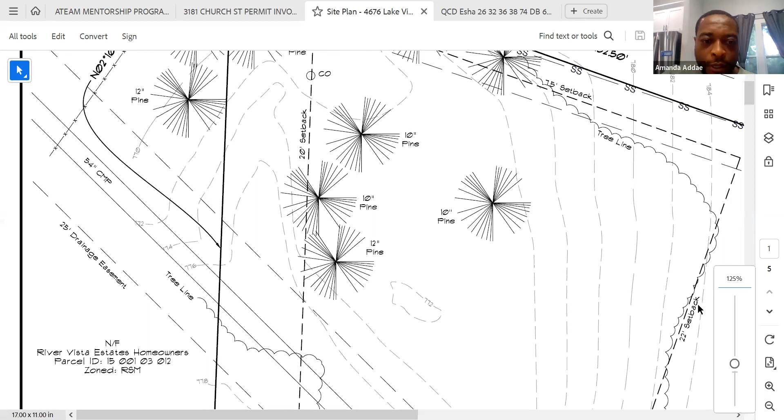So what we had here, let me see - when I pull this up, do I need to make it big? Can y'all see it? Yeah, okay. So on this one, they have the street elevation, and on the street elevation we were at 786 from the street. From the 786 from the street, when we drop down, let me see if I can expand this. Okay, here we go, I'm going to try and blow this up more. Y'all see this better, right? Yeah, okay. So, trying to get to this - this is 784, right?

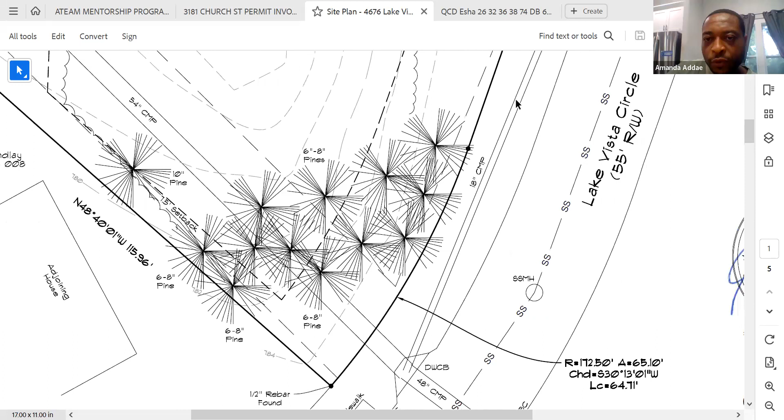That's on the property, that's the second one, right? But the street, it's up - you got to scroll up, it's 786, right there. You see that? Everybody see that, right? Okay, so that's your 786.

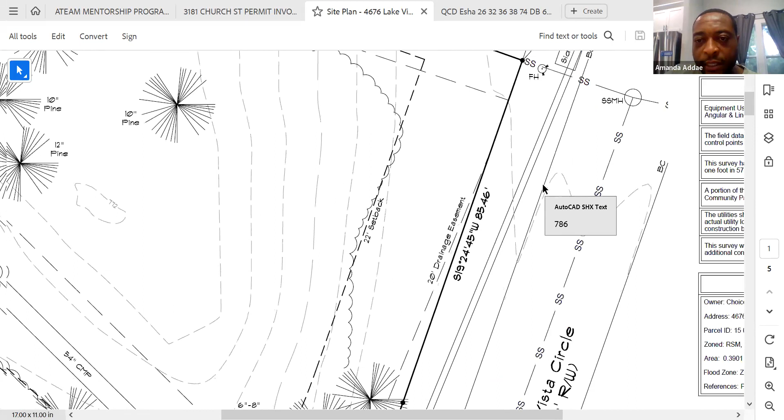That's your street elevation. So from the 786, you asked me am I subtracting it? Definitely. 786 takes us all through here. So if we're facing the property, the right side of the property is 786.

But when we get to this part of the property, when we come about 20 to 22 feet in, we see there's a drop. Not a major drop, but it drops to 782. We got 784 here, and then we have 782 here. So yes, we start subtracting. From 786 to 784, that's 2 feet.

So without physically being there, we can imagine that this lot dropped 2 feet within a 20-foot span, and then it dropped again. So I'm sorry, 786, 784, and then it went to 780. Where are we at here? So 786 to 784 drop, then 782, another 2 feet. So we drop 4 feet as we're going down, right?

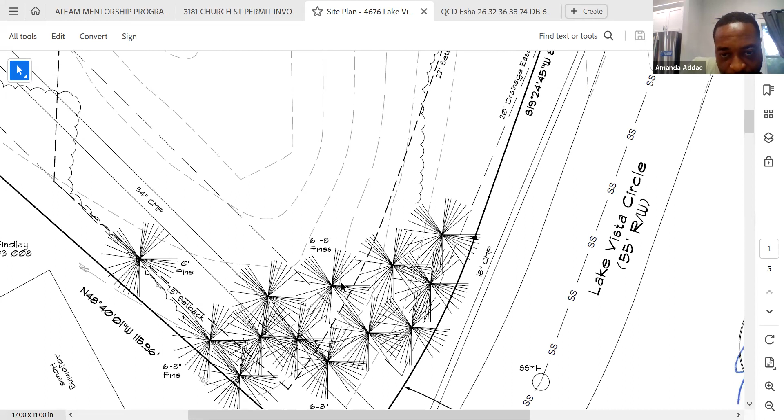And then it drops again, like over here it actually goes to 780. This is coming around, a little difficult to follow, but somewhere around here, yeah, you see all that. So then we drop to 780, you're dropping down again, right? So you went from 786 all the way to 780. That's 6 feet, a 6-foot drop.

And then we go all the way down. It drops down more gradually, but you end up where your basic bottom is going to be. You're at 772, so you're about 12 feet right there, where your building is actually going to be situated at.

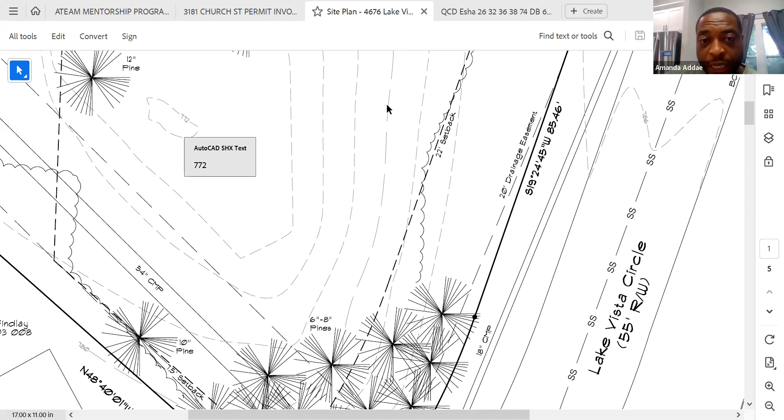Okay, yeah. So that tells you that this land is sloping down. And you're going to have to, based on this alone, without even being to the site and seeing anything, this tells you that I'm about 12 feet down from the street level by the time I hit where my house is going to be. That is definitely a basement level.

Because now that 12-foot down is going to end up being where your basement will be built, before your first floor, which then will end up being on the street level. That'll be your entrance. So is there like a base or standard range that says if you drop this amount, then it's considered a basement versus a slab?

It's yes and no. Most crawl spaces, we normally like to stick within 4 feet. So if it's just a 4-foot drop, let's say if the whole elevation was just 4 feet from 786 to 782 all the way across, then we have 2 options. We can do a crawl space, meaning we got to elevate the house up about 4 feet before we get to the street level. Okay, so if we do it that way, then yes, we can be on a crawl space.

However, let's say somebody said, well, I want a slab, but you're dropping down 4 feet, can you do it? The answer is yes. But what will have to happen is, assuming it's just a 4-foot drop, you would go to the back of the property and around the property, and you will pour a solid concrete wall as high up as the street level, all the way around it. And then you will backfill it with dirt and compact it.

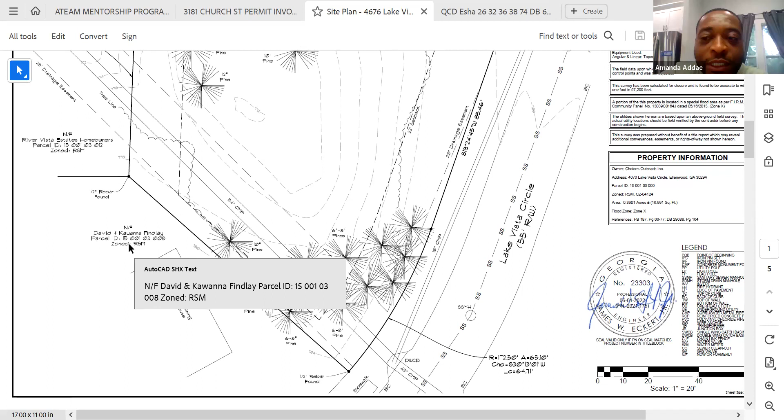Can y'all see this right here? Yeah. What does it say? It says zoned, and what does it say after the zoned? Residential single, I don't know what that M is. But what do you see? RSM? RSM. All right, we're gonna do the old school. We're gonna pull up Google.

Zoning RSM, DeKalb County. You see that? So when the survey gives you those kind of things, and the legend doesn't tell you exactly what it says, RSM is telling you, for DeKalb County, this is residential small lot mix, single family attached or detached, at a range of 4 to 8 units per acre, and the minimum lot size ranges from 1,000 to 5,000 square feet.

Now your lot size is going to be based on what you have here. When they take the whole dimensions of your lot, they're going to get you the lot size, which is normally on your survey. Right now you have an area of 16,991 square feet. In terms of the residential building you can do, you fit that criteria, so that means yes, we can put a residential property here.

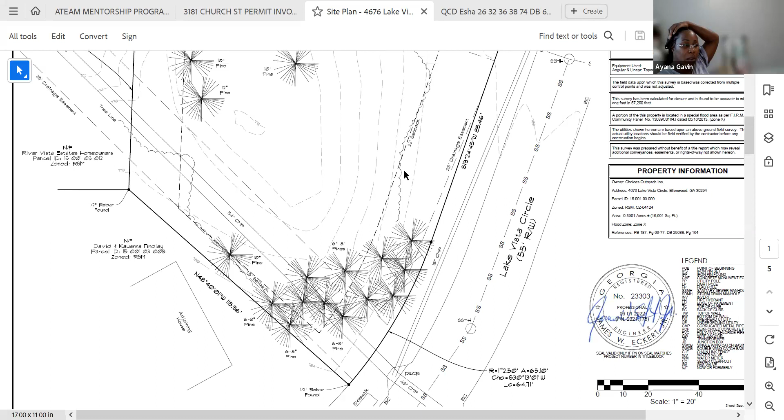If it was zoned something else—and of course in this case we know it's residential because other properties are there—I'm looking at it from the standpoint of if someone just sent you this and you had no clue what you were looking at, hadn't seen the neighborhood, this can give you an assessment of what you can build. If somebody sends you something zoned commercial, you obviously can't just go do residential unless you get a zoning change and all kinds of stuff. So these are things to pay attention to. I didn't bring that up in the video, but pay attention to what's there that allows you to build what you want to build, and it could be industrial, it could be commercial.

Go ahead. So you're saying the lot size is based on what's within the setbacks? Your buildable area. Your lot size is your property, within the property line boundary. Yeah, your lot size is within your property line—that's the property that you own. So your lot size is all of it, right? The size of your lot is everything that you own.

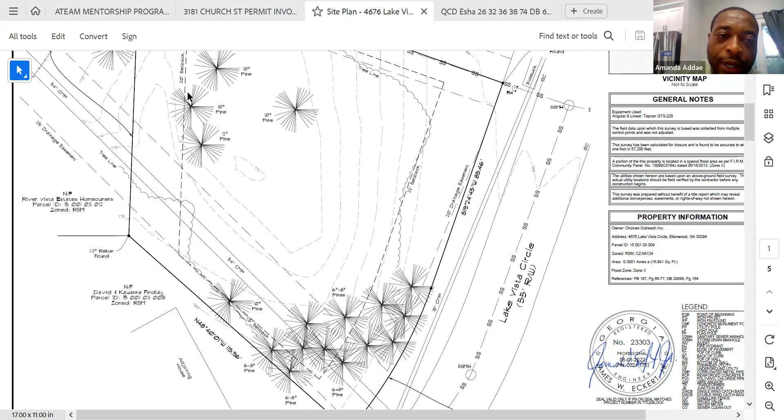But your buildable area is within the setbacks. It's within the setbacks because it's your setbacks that establishes your buildable area.

I mentioned something like the 54-inch CMP, and we talked about that because it was in the legend, right? Okay, the corrugated metal pipe.

So on this property, we do have a pipe here. Now, let's say it was something else, let's say it was a creek. And every creek has a setback. Normally, it's going to be between 25 feet to 75 feet.

If it was a creek and we had the setbacks, we will have to pay attention to that because the creek, let's say it had a creek here, we will have to go 25 to 75 feet away from the creek before we can even start building. So if that was the case, that will reduce our buildable area drastically.

This is what happens to a lot of people. If they don't get the proper survey, if they don't see all the stuff that's in it, if they don't see what's going on, they get a property and then they're stuck, trying to get rid of it because now they realize they can't build. These are real critical key things. That survey is so critical when you get it - you have to be able to see everything and understand what's going on.

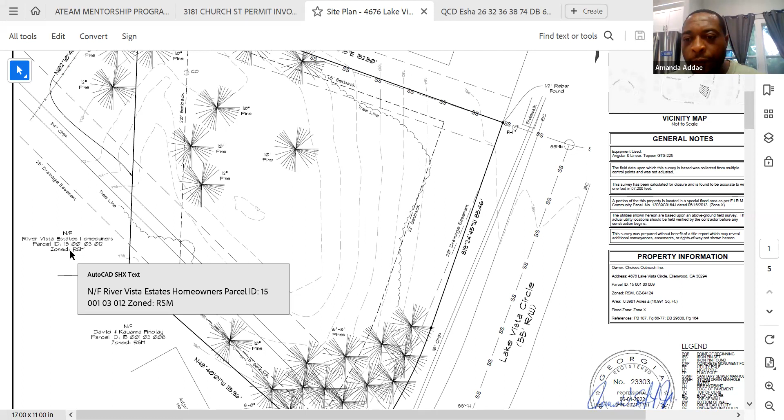So once again, things to pay attention to when you're looking over your site plan. Did anybody have any questions pertaining to the site plan based on that video, or if you're looking at it right now, any questions you may have?

Survey? Don't confuse me. Survey, I'm tripping. It's your fault.

It's your fault, Ayana, because you started that site plan stuff. But that's coming up in your next video. That's gonna be cool, because now we're gonna start getting to the real details of what's happening next.

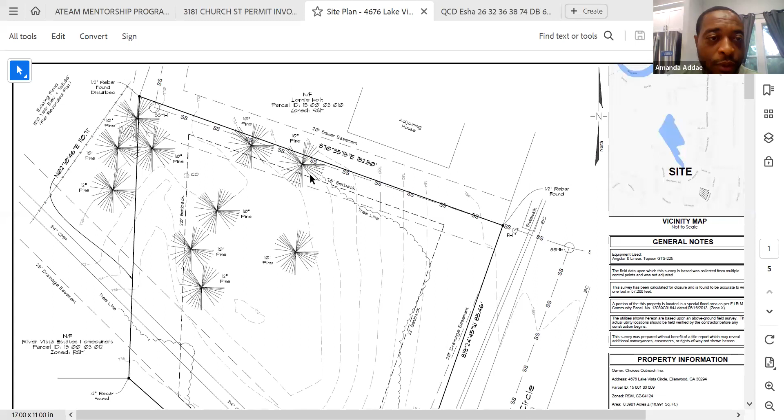That's exciting. But are there any more questions about the survey? Mind you, moving forward at this point, this is mentorship. So if you have any questions and there's anything else you need to know, ask me. I'm not claiming to know everything. I know what I know, but I also don't know everything. And if I don't know it, I have the experts in those fields. There's nothing stopping me from picking up a phone and getting them, questioning them, and getting the answers for you. So there's nothing we can't answer.

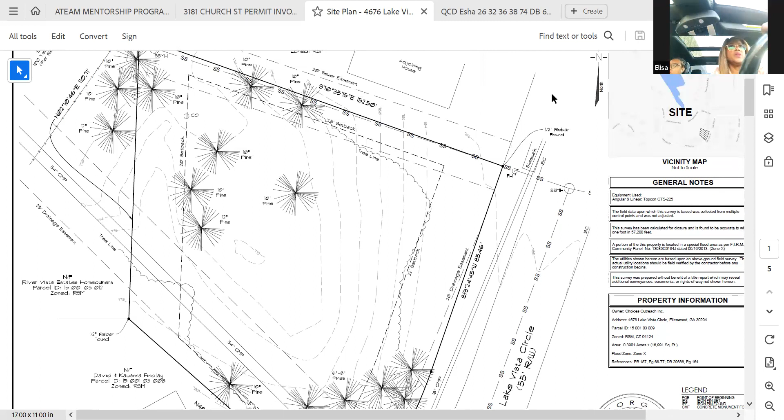Go ahead, I have a question. So with the survey, that seemed like a tedious thing, understanding and coordinating the setbacks along with your plan. So when you understand and know your setbacks, when you send your paperwork in for permitting, I'm just trying to make sure, for mistake purposes, does the county catch your mistakes if your setbacks aren't right?

100%. So for instance, our beloved DeKalb County, when you give them the permits, it's submitted to different departments. One of the departments that gets it is zoning. There's land disturbance, there's zoning, there's people that look at stuff we're going to discuss on the site plan, but zoning definitely looks to make sure you're within your setbacks. Zoning is going to make sure you don't have a floodplain, let's say, where you have to have a setback away from where your property starts. They're going to look at all that stuff. So yeah, they're the ones that catch that stuff. You're not about to slip something through. And they're very thorough. Most counties are, because if they permit you to build out of your buildable zone and something happens, you can actually sue them.

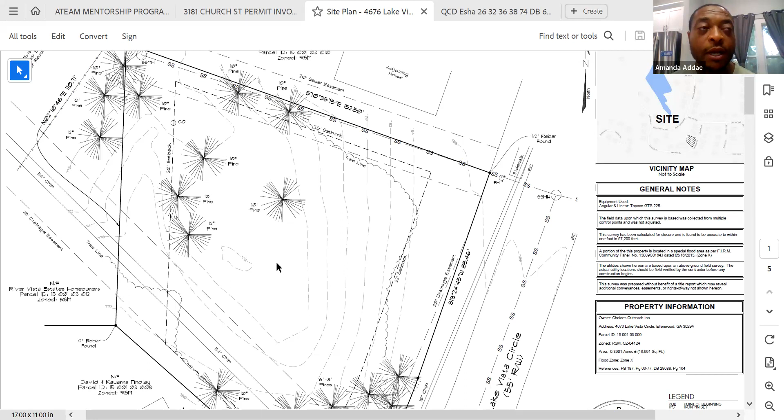But soil test doesn't matter. So for your purposes, you may want a soil test to make sure your ground is hard, but as far as the county is concerned, when you're doing septic tank, you need a soil test.

Okay, so it's Gwinnett. I'm just trying to think of a client I had that was going to do construction perm, and they found a lot, but they were complaining that some parts of the lots were too rocky, there was too much stone there. Yes. So does that mean Gwinnett uses septic tanks? Is that how they were able to find that out, or is that something else? That's something else. It's two things, and I'll touch on it briefly.

If you're on land that you suspect has rock there, or even when you do a survey and they come back and say there's rock in this area, you do want to do a soil test to see where your rock is. If the rock is impacting your buildable area, then you may have to blast that rock, depending on how deep it is. And blasting is a whole other animal in itself.

But a lot of times people get into that because to do a septic tank, you usually have to have an acre of land minimum. So when they have an acre of land and know they have to put septic on it, they do a soil test because they have to. And normally in doing that soil test is when they find out there's rock here. So with this rock, we have a choice: we're either going to blast, or we're going to shift our buildable area to another location, or shift the septic tank to another location that may not have as much rock. So if they're finding rock and it's impacting their buildable area or where their septic tank may go, then yes, that's going to be the issue.

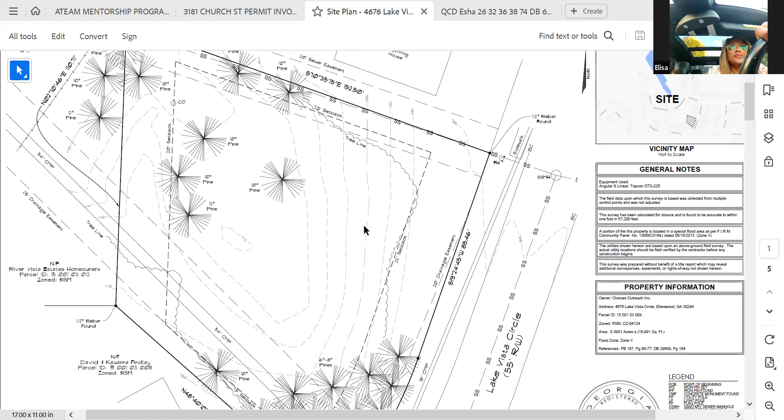Are you going to go over the other pages that were part of this? Actually, the other pages is what's going to get us into our next lesson. We're going to start discussing all these things, your construction pad, right? We're going to talk about all these things. This is just a brief preview.

Okay, look at that. What's that look like? All right, house. All right, cool. That's a site plan.

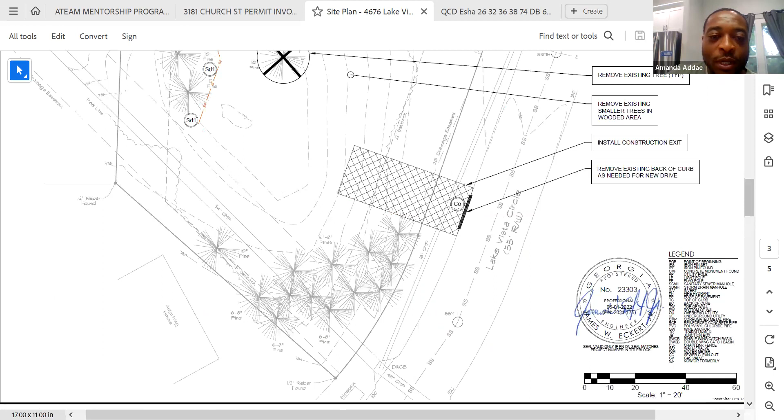So we're going to get to the very smart. You're one of them students that used to study ahead, weren't you? Well, I actually just watched it right before this meeting started, so it's fresh in your mind.

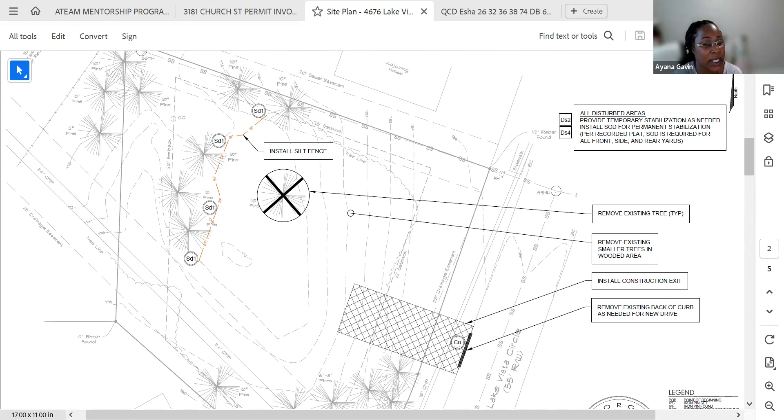But very good, let me ask you something. If we're only looking at this one page and we're standing in front of the property, what will we be able to look at and see? Will we be able to identify anything? Is it something that will be marked on the land if we're looking at it?

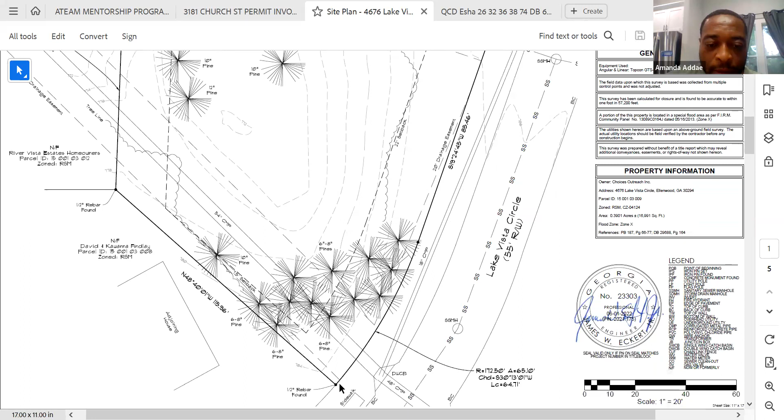Good question. So when you get there, when the survey is done, these are things you'll be able to find - this 1/2 inch rebar right here for your boundary. Normally we're able to go and locate the boundaries of the property because they'll mark it.

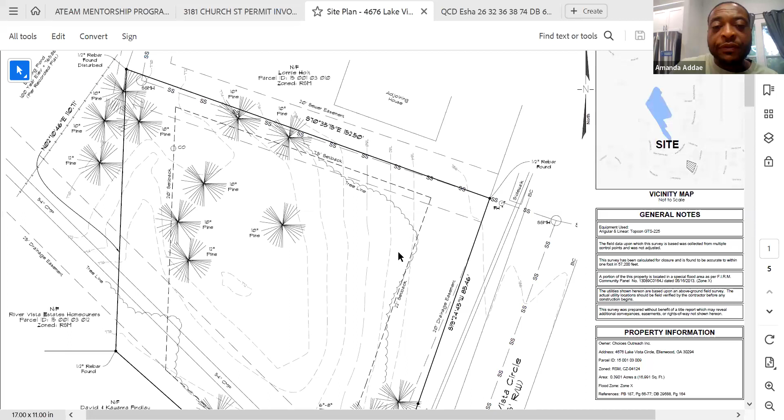They usually do, but it's not always there. Sometimes you have to go there and find it. But when you do a survey, they are supposed to mark it. In this particular case, the people that did this, I actually had to bring them back for the other lots we're doing, and we're going to shift to that after we get through this section. I had to let them come out there and mark the area, so you'll be able to see the boundaries that they marked.

You'll be able to see these trees. And it's important because just because you're going to build a house doesn't give you the right to come in here and clear all these trees out, because it's actually going to be based on what the county says. So some of these trees that are in the buildable area will be removed, but the county is going to decide, don't touch these - and if you touch them, the consequences are very expensive.

So normally they let you remove the trees. If you go to the site, to answer your question, you should be able to locate the corners. You should be able to locate these trees - these 10-inch, 6-inch, and 8-inch pine trees - and you should be able to locate these ones as well. But all in between here is going to be a whole lot of overgrown underbrush that we have to clear out. So when we start clearing this site out, all this will come out. The only ones that will be left are the ones that the county said we have to leave - probably these. When we get to the next section and the site plan, you'll see those.

So would you leave the trees that are right at the setback line, or would you remove those? I will leave the trees that the county says I have to leave, and I will remove the trees that the county says I don't have to leave. They're going to tell me what I need to leave, and they're also going to tell me what I need to plant.

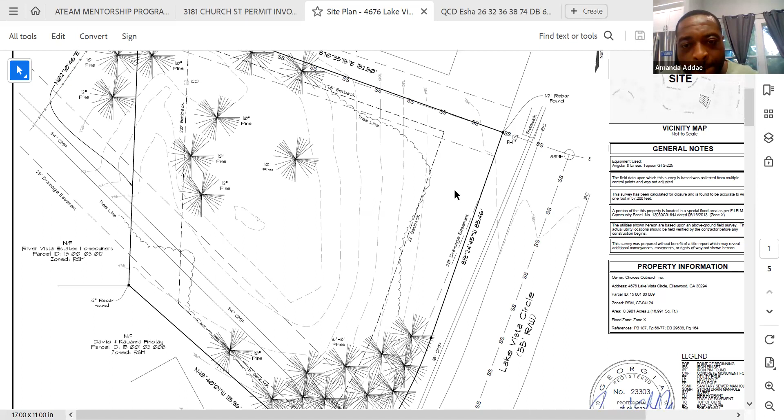I'm going to get us the next video. We discussed the land and the survey, so next we're going to discuss the building plans, because now we have to determine the building plan that's going to go on the site. I wanted to stretch it out a bit and discuss more about the building plan, but I think I'll do it this way: I'll discuss the building plan based on what we need to do for the footprint to fit the survey area, then jump directly into the site plan so we stay in the same vein, going from survey to site plan.

After we finish the site plan, we're going to do an entire video strictly on the building plan and go into details, because then we'll shift to the site where we're working, and we'll be able to go through everything from the footings and the layout, understanding that. Then we're going to get really deep with it, breaking it down, blueprints, reading it, doing material takeoff, all that stuff.

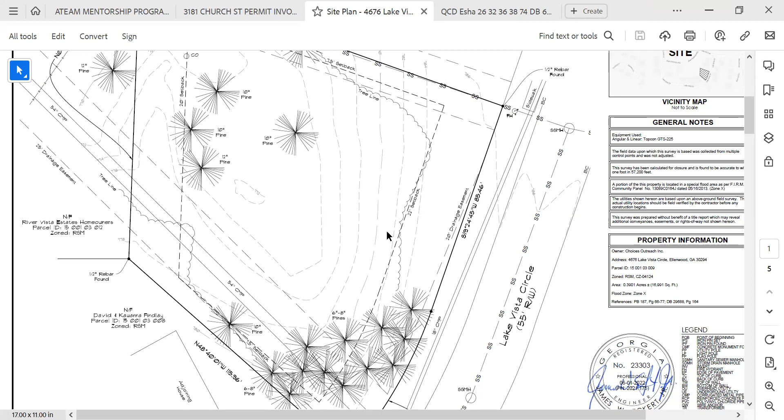Explaining the setbacks and all the stuff that you're going over now. Oh nah, their job is to do it, our job is to understand it. Because they're not here to teach. They're expecting that when a contractor applies for this information, they do what they do, and it's up to us to be able to break it down. Yeah, they're not going to be here teaching this stuff, but that's our job, that's why we're here.